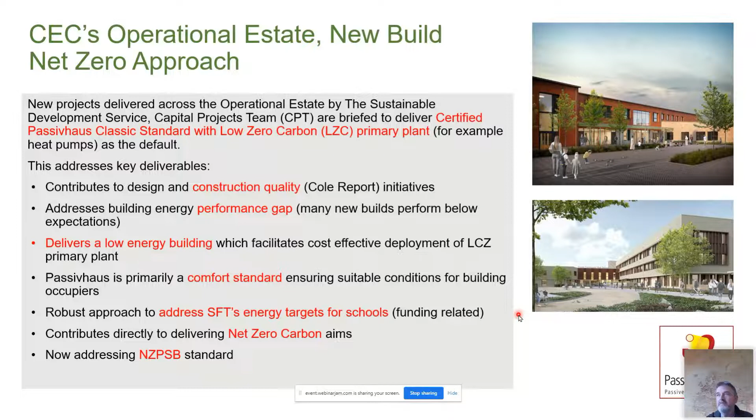So that's the new build, and strangely, that's the easy bit. The challenge is the existing estate, and we have 400 heated buildings on our operational estate. We're talking the schools, community centres, care homes, offices, libraries, and such like. And then sitting alongside that, we've got other properties which are not directly under our control, but we quite often get involved in works associated with them, the Edinburgh leisure facilities. So there's big opportunity there as well, but big challenges.

And another aspect of this is if we're setting targets as a city, there's a requirement to show some leadership. And in doing that, it really got us out of the blocks very quickly in coming up with how are we going to set out an approach and think about a methodology for addressing this issue.

Just a little bit on dealing with existing buildings. The inverted pyramid on the right captures in decreasing opportunity for reducing energy. If you're building a new building, get the location, orientation and form right, good Passive House stuff. And the fabric element down to appliances, lighting and use. And when you're dealing with an existing building, the ship has sailed for the upper issue where there would be big opportunity like location, orientation and form.

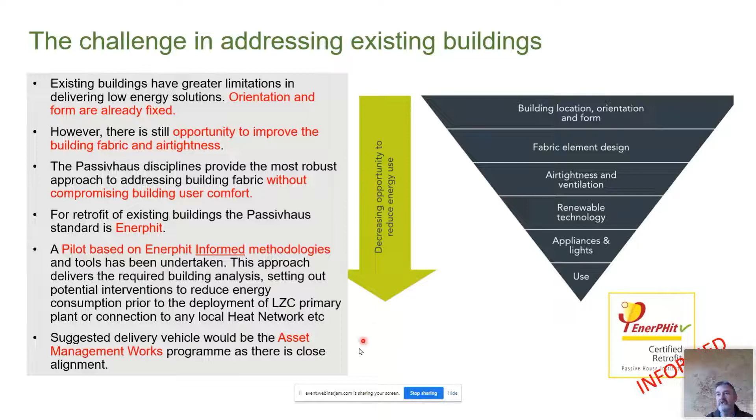And our route for this, being a local authority, we do asset management works, our life cycle replacement works. We've been on a kind of increased spend for the last 5-6 years. We actually peaked at spending 48 million on our existing operational estate while it was still up and running in 2019-20 before lockdown, and we've throttled that back a bit, but we've shown we can do quite significant interventions on our estate without necessarily closing buildings. So this was the kind of vehicle by which we would be looking at delivering any of these retrofits.

Just a little bit on asset management type work that we do. We typically would do roofing, we would typically do windows, everything highlighted in red. We would not normally be doing wall insulation, underfloor insulation, but we would in the past be doing boilers, replacement, electrical rewires and the like.

But now the things that I've got highlighted in yellow are things that we would likely be looking at going forward for buildings, wall insulation, underfloor insulation. If we're going to seal the building, the introduction of mechanical ventilation, heat recovery, or demand controlled extract, and potentially solar shading if we feel we've gone too aggressive with the approach we've taken to the building.

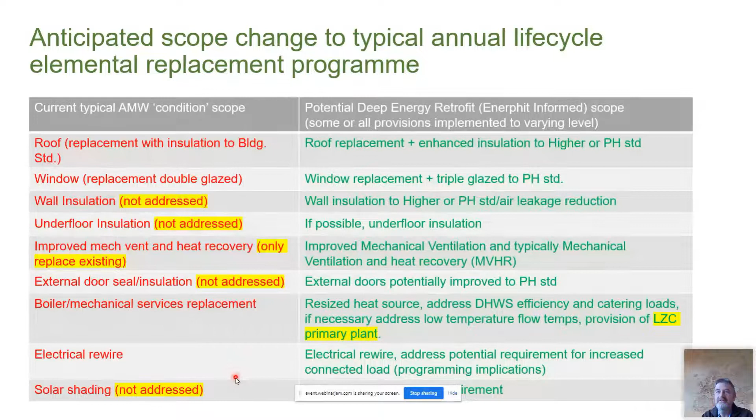So what I'm going to talk you through is our approach, using 2 pilot buildings, which we subsequently rolled out to another 10 buildings - one's a nursery and one's a primary school. I'll also cover a bit on our performance weighting methodology, why we took that approach, and something on quality and our next steps.

So, taking our 2 buildings, there's an image of each, and I'll say a little bit more about them when we dig deep into each one. One's a nursery building and the other is a primary school, and they're both very different - we chose them because they're very different. That's where we started the work to inform the PHPP modelling.

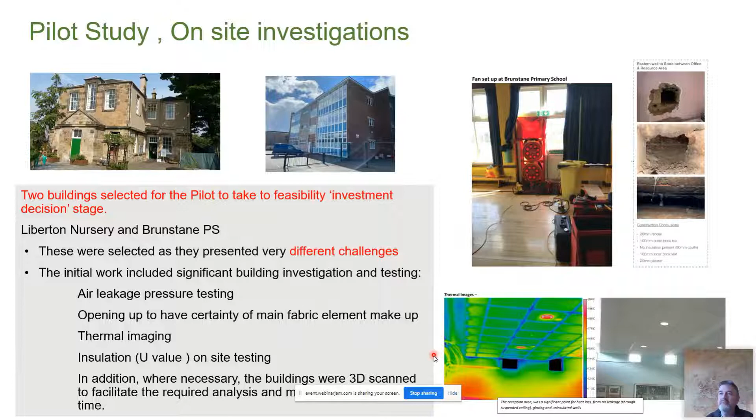We actually did air leakage pressure testing. We physically opened up the fabric to understand the buildup of key parts of the external fabric of the building. We did thermal imaging to understand where thermal bridging was possibly taking place, insulation U value on-site testing where conditions allowed, and also for modelling purposes on these two we did 3D scanning because we didn't have models of the buildings. So that was the approach taken.

A little bit on, as I said, our EnerPHit informed pilot methodology. What we do is take that information, build up the PHPP model, test that model against the actual performance of the building, then as a group think of suites of interventions of different levels of retrofit and put them through the model to see what we get in terms of energy consumption associated with it. So it's really an EnerPHit informed retrofit plan, EIRP, which I believe is an expression the Passive House Trust has started to adopt in this context.

And then a little bit on our total performance index, our weighting system to inform decision making. It's all about providing a series of options for an informed investment decision, or to help inform an investment decision.

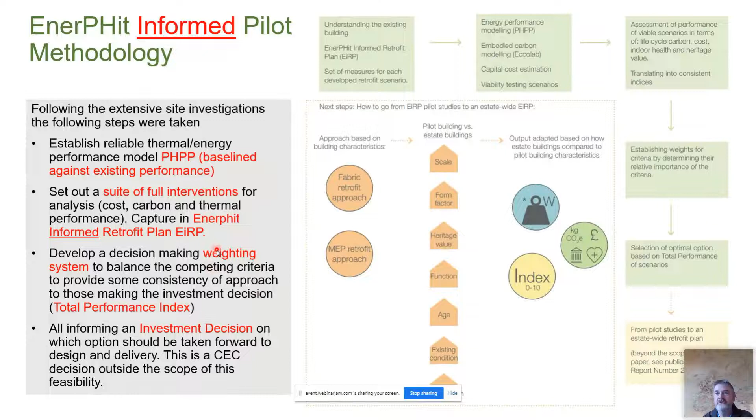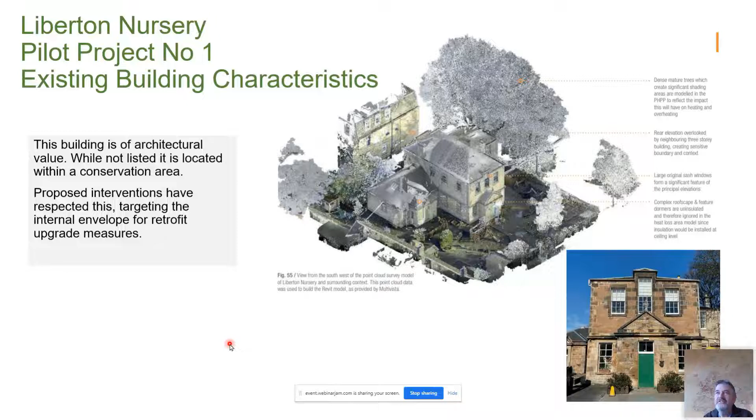So the first building, a Victorian stone building, is in a conservation area, but it's not actually listed itself, so that meant we could play about with it more. But what we were really looking at is that quite a lot of the estate in Edinburgh can be like this, so it's important that we put ourselves through the challenge of addressing one of these as an early pilot.

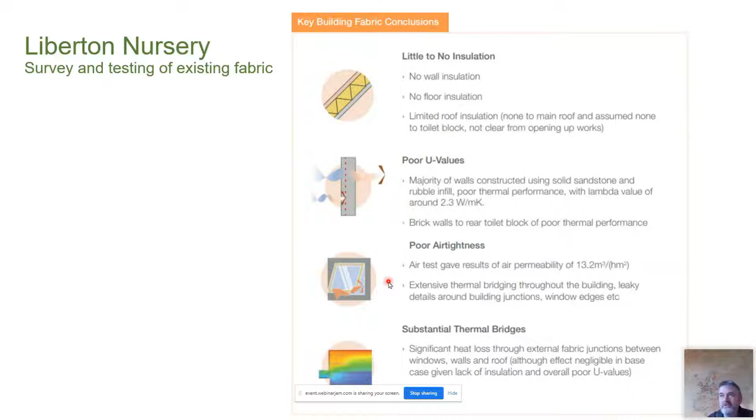What did we find when we opened it up and did all that testing? Well, no surprises - little or no insulation, U values were poor, air tightness was poor, we were getting a permeability of 13.2 cubic meters per hour per square meter, and we identified substantial thermal bridges.

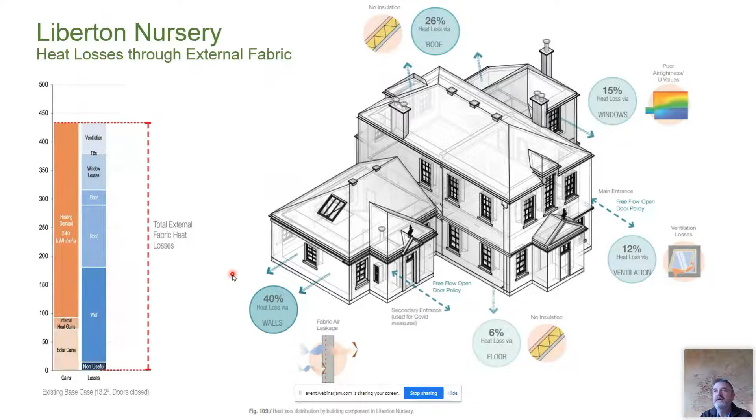If we were looking to go full EnerPhit, do the full thing, the gold standard you could call it, how far away is this building from that gold standard? You can see the heat demand is 340, and we would have to get down to less than 25. Air tightness - I'll keep it in air changes per hour - is 12.6, and we're trying to get down to less than 1. So this building would have a significant journey to go through to get to full EnerPhit.

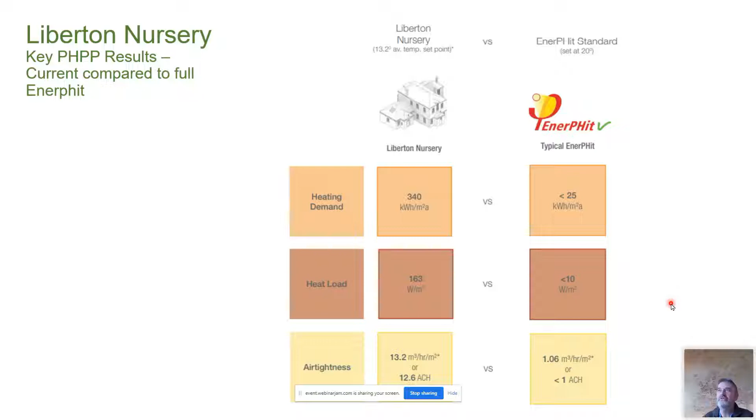This slide sets out - and apologies, there's a lot on it - the different levels of intervention and what the resulting heat demand modelling was. So what I'll do is, this top section here, the next slide kind of zooms in on those and shows the different levels of intervention.

The first one starts at do nothing - that's the existing building as we initially modelled it. MEP only was really talking about just putting in a heat pump. Not something you would do, but just to go through the exercise - put in a heat pump and take out the boiler - and then different levels of retrofit through to full EnerPhit.

So just focusing on these in a little more detail - the heat pump, we've got our air tightness shown there. But when we got to our kind of starting point to improve, you can see we're going for internal insulation on the walls, and you can see the insulation level starting to increase as you go through the standards.

And we've also got the introduction of mechanical ventilation heat recovery once we get to an air tightness of about 3, where there's traditionally a return on that investment. And then the full EnerPhit is a fully certified MVHR unit, more efficient than just a typical one.

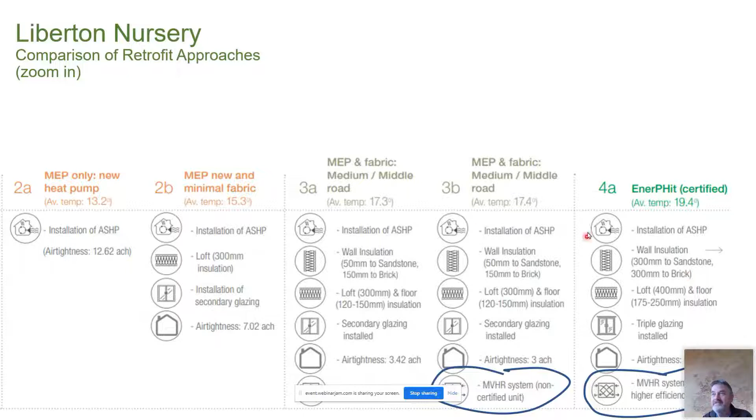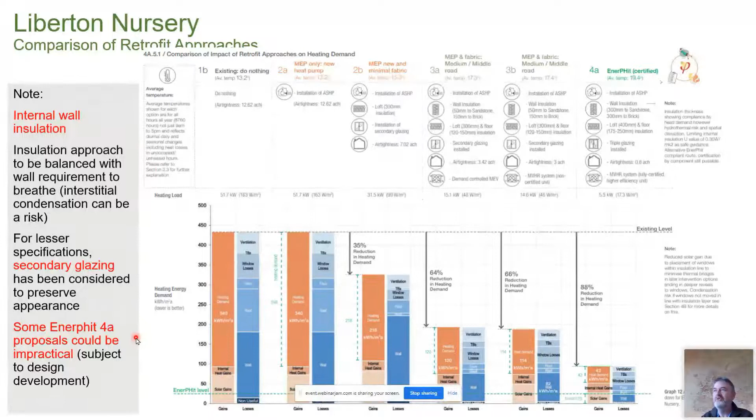Going back up, for these different levels of intervention, you can see reduction in heat demand: 35%, 64%, 88% reduction in heat demand. Some of these go from secondary glazing through to triple glazing for the full EnerPhit approach. Full EnerPhit could potentially be deemed impractical if you're losing 300 millimeters with the internal wall coming in — you're losing a bit of GIFA in your building.

We also did a bit of whole life carbon analysis, and this is really just a summary. I don't intend going into huge detail. What we did is we looked at it from the point of view of the deeper interventions, which introduced a greater amount of embodied carbon, and we thought, well, are we actually making the situation worse with this additional embodied carbon?

No — what we proved is that the operational carbon reduction more than offset the additional embodied carbon. So you were seeing over 70% reduction in whole life carbon associated with the deeper interventions. Obviously, the lower level interventions add less embodied carbon, and also the fact you're going from gas to electricity means you're making a step change in your operational carbon anyway. So that would show itself as a similar argument. We really did the modelling based on the two options that had the greater amount of additional embodied carbon.

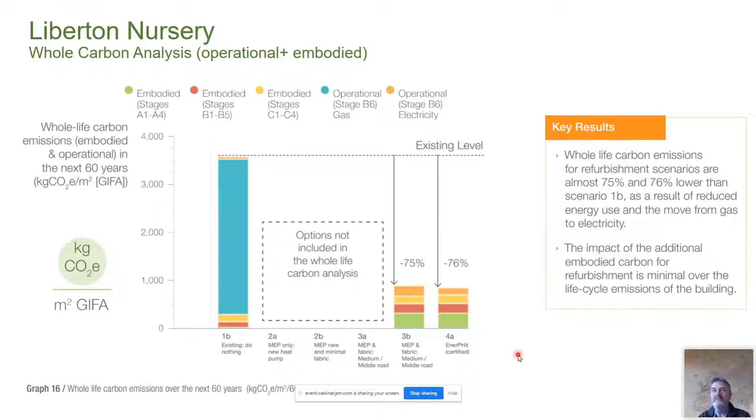Running costs — this is where it gets interesting. Please bear in mind, this is all based on third quarter 2021 energy figures for gas and electricity. But the overall story, possibly everything's coming towards improving fabric, but there's still some way to go. So the overall story stays broadly the same.

When we took out the gas and put in the heat pumps, despite the benefits of the seasonal coefficient of performance of the heat pumps, the mere cost of electricity meant on third quarter 2021 tariffs you were doubling the running costs. And then you could see the reduction — this is where I talked earlier about the step-off point. My initial thinking is maybe we do a level of intervention where the step-off point means our running costs aren't much different, so we've done enough fabric improvement before we deploy the heat pumps.

So you're getting into quite a deep level of retrofit to be able to do that. But as I say, this all jumps about a little bit with the tariffs that have changed and keep changing as well.

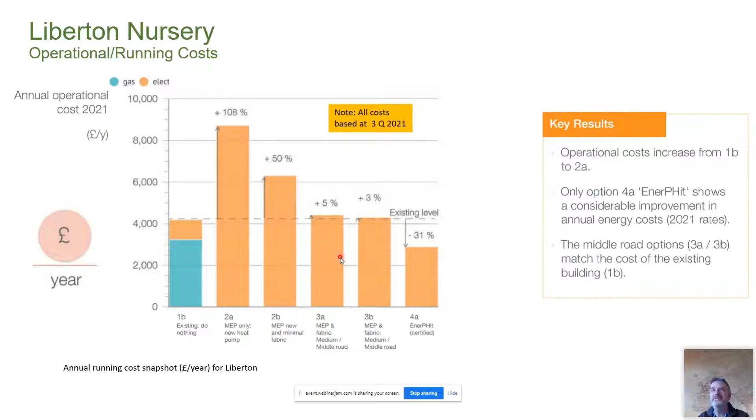All these graphs — I know some people prefer to see the numbers, so here are the numbers. Down the left we have our different levels of intervention through to full EnerPhit at the bottom. Our heat demand, as I say, the first one, we do nothing — we just take out the boiler and put in a heat pump. So 340 kilowatt hours per square meter down to 42, and there's a percentage reduction.

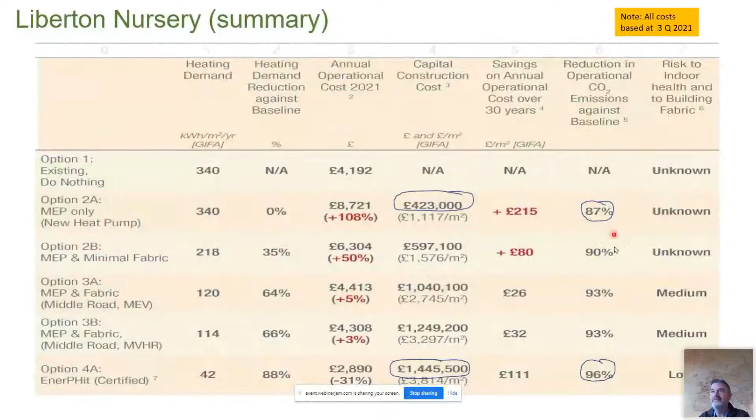It was just something we did as an exercise. If we just swap out the boiler for a heat pump, knowingly, existing buildings aren't great, and heat pumps aren't great at addressing existing buildings. Heat pumps are fantastic things, but they do have their limitations. This would definitely deliver your 87% reduction in carbon because you've gone electric. But you're going to need 3 times the number of heat emitters because of the lower flow temperature of the heat pump. You want to get that flow temperature down to benefit the coefficient of performance, and as low as you can go, you'd have a large heat pump and thermal store—it nearly becomes a heat pump farm outside.

This was the playground of the nursery, so that would be a question. You'd have greater impact on the local network in Edinburgh. It varies around the country, but we've been told most areas of Edinburgh are at or near capacity on the grid, since it's still a growing city. So we have to look at energy reduction before we go electric. Then there's occupier comfort concerns—if this is still a drafty building with quick fluctuations in air movement and temperature, and the slower response of the heat pump system could be problematic for us as well. So a number of considerations there, and anything you do needs analysis and care.

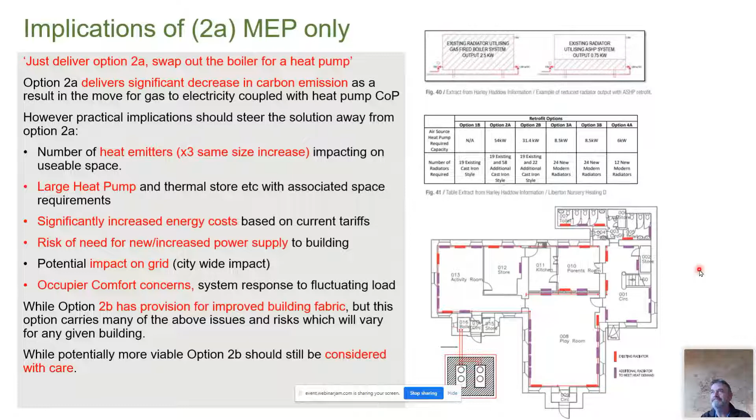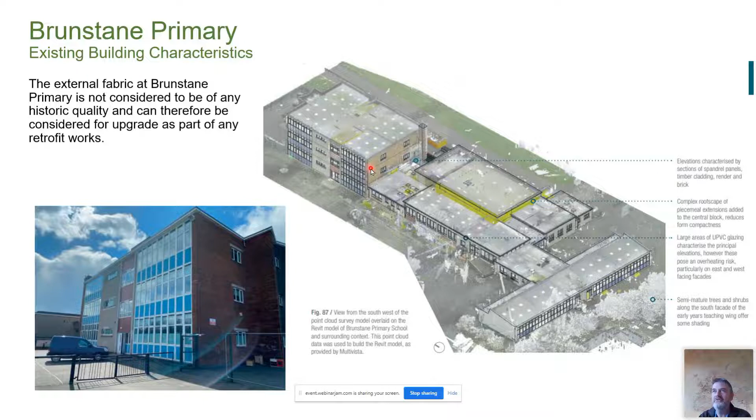The other building is a 60s primary, and as you can see, it has quite a significant glazing-to-wall ratio. As part of that testing, opening up, and thermal imaging, we also engage with the building user to identify areas that have been problematic operationally from a comfort point of view. And this building, surprise surprise, summertime overheating was a significant issue, which has a bearing on the approach and solutions we'd come up with.

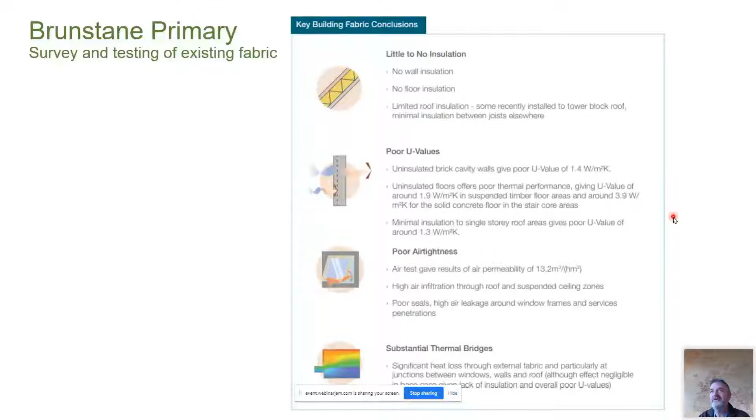That analysis, not very different for a very different building—the insulation wasn't great, so the U-values weren't great. The air tightness was 13.2, with thermal bridges everywhere. It's a bit of a shame on our construction industry, but we haven't been doing it much better than the Victorians right up to the 60s. And when you look at the performance gap, we still haven't been that great.

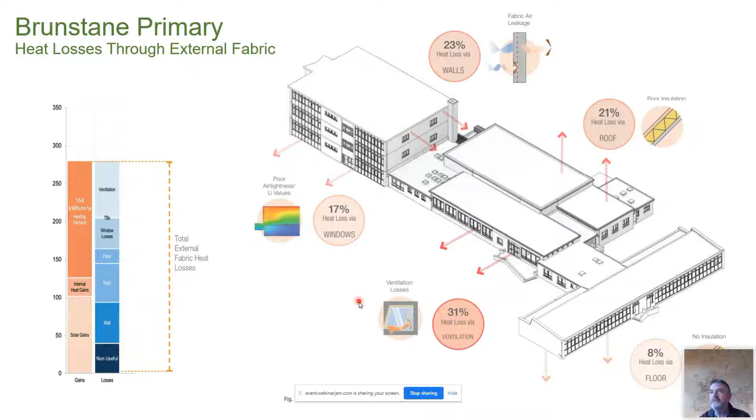Again, it's a repetitive process—same approach, same methodology applied to two different buildings, and we've done it for 12 now. We've got 154, and if we wanted to go full EnerPHit, you can see to get down to 25 is a bit of a journey. Similarly, the air change rate is high at 9.6—you'd be wanting to get down to less than 1.

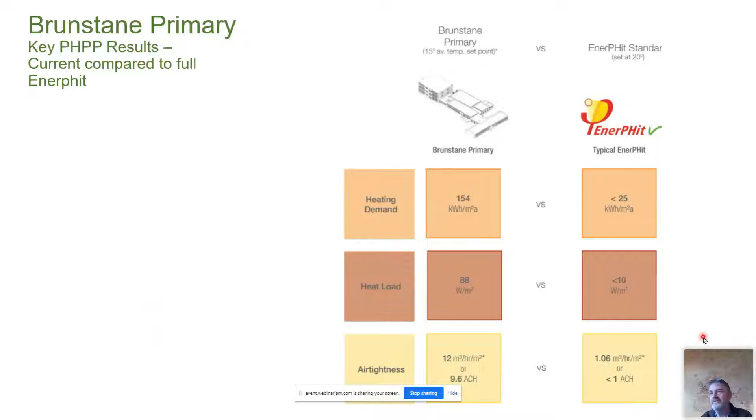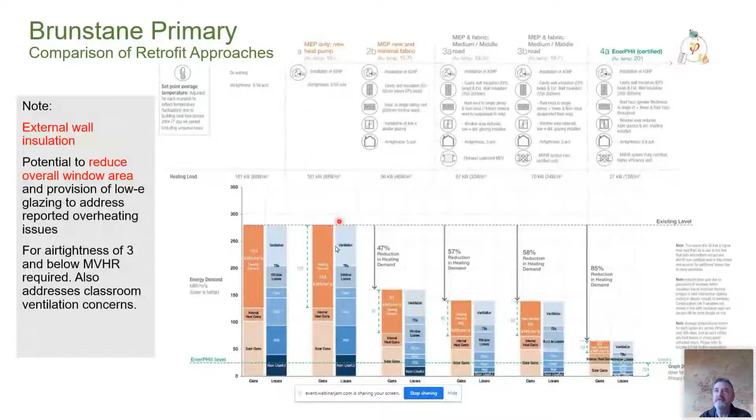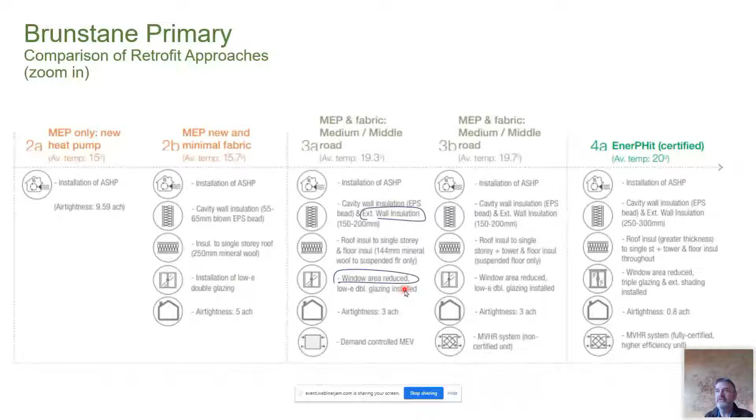As I say, similar approach, albeit these interventions are building specific. I'll go to the next slide to zoom in on these. We've got the MEP only option, which is just take out the boiler, put in a heat pump as a starting point—that's this one here, with different levels of intervention. What I've circled is what's different here: the last building used internal wall insulation, but here there's the opportunity to go external, without impacting the GIFA, and it's a quicker, simpler approach. Once we go external wall insulation, we've also got the opportunity to reduce that window area, so that's become part of the approach.

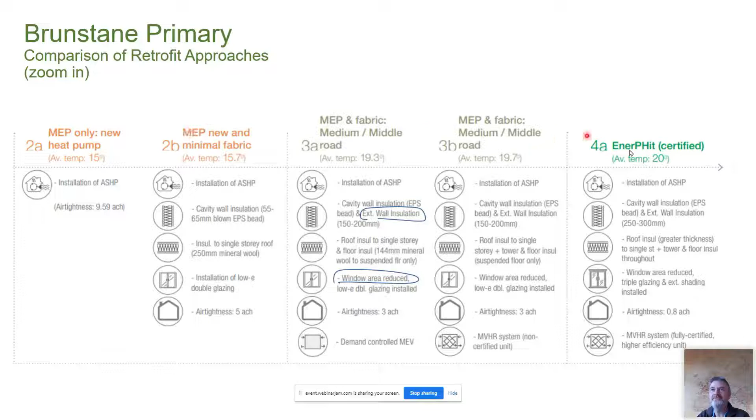And we've gone from double glazing through to triple glazing as a solution on that. The MVHR kicks in when the air change rate's down to 3, albeit we've got demand-controlled mechanical extract ventilation on this particular option. These options are really just what the team sat down and modeled, to see what it turns out like. We'll get better at this as we go along, and maybe have something more targeted—I'll come to that in a minute.

So the whole life carbon analysis, very different buildings, very similar story. The reduction or addition of embodied carbon associated with these deeper interventions was more than offset by the reduction in operational carbon. So we've got around a 70% reduction overall. What's remarkable is such different buildings show the same things, albeit the numbers may be changing, the same patterns emerge.

On operational running costs, yes, there's an increase if you took out the boiler and put in a heat pump without improving the fabric. It's not until you're getting into these deeper levels of retrofit, or ideally full EnerPhit, that you're seeing a saving. But as I say, that's based on third quarter 2021 figures.

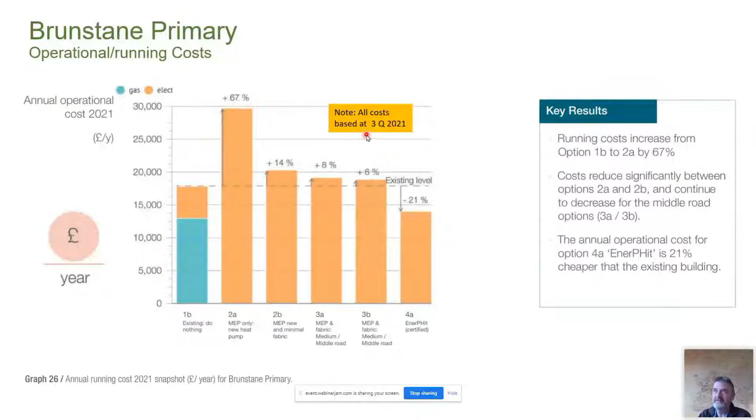The return on investment, again, just the same pattern. You do feel when you're doing this, going from one building to the next and seeing the same thing emerge, why are we doing this analysis every time? But at the moment we've done it for the first group because we think it's important to see if the patterns emerge. And it's the same point: it's not a return on investment, it's a carbon reduction investment.

Again, looking at the actual numbers, you can see the same pattern. You've got 154 reducing to 23 kilowatt hours, and you can see the reduction in heat demand, up to 85% reduction. The cost base at that time, third quarter 2021, was 1.5 million, and it would be up to 7 million to address that building to full EnerPhit.

Just as an indication, we've taken that building further, and I'm not saying we're going to necessarily deliver it to full EnerPhit, but we were asked to for a specific reason, about grant funding. We might step back from it, but that 7 million is more like 12 now, because you've got to add in the thing that figure has always excluded: decant. But at the time we identified decant would be necessary, even with opportunities to phase wings. By the time you add decant and inflation, you're looking at 12 to 13 million for full EnerPhit for that primary school.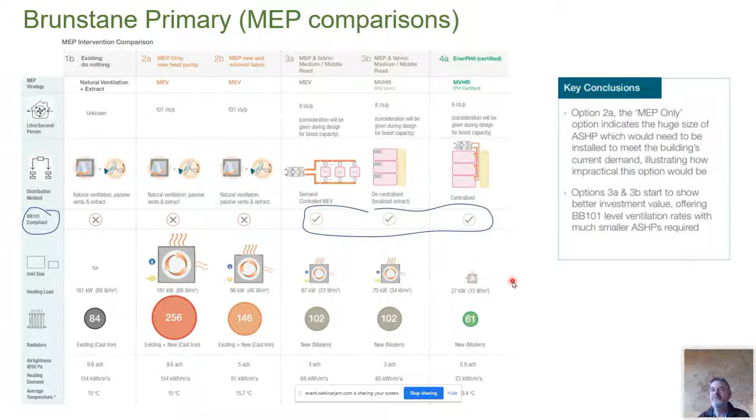We thought comfort, life cycle carbon, and running costs were the most important issues for us, followed by capital cost, then heritage impact, fabric risk, and then user disruption. I thought user disruption would be challenged, but it wasn't. The reason we gave it such a low score was that disruption would be for about 18 months of the life of the building.

But how this really works is we look at each particular issue. Some of them we've calculated and analysed, like running costs, so we know which one performs best and which performs worse on running cost. Some we know pretty much how it'll perform from an overheating or thermal comfort point of view.

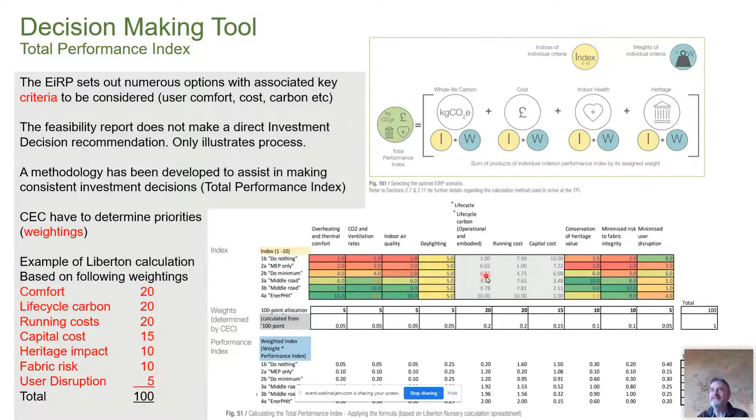So we give them that kind of index, multiply it by the weighting, add them all up and get a total performance index, just to give a feel for, based on what we think is important, which one comes out best. And based on that, for the nursery building, the level before full EnerPhit came into being slightly the best. But as these figures are so close together, you could say a kind of sensitivity analysis - you don't have to tweak very much to change these numbers about, but it's indicative.

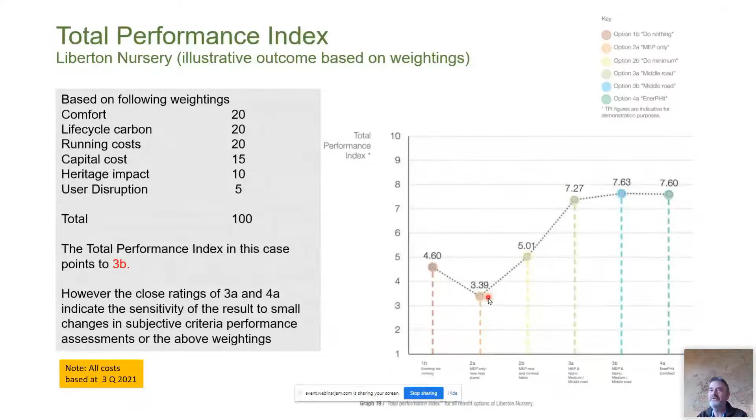But it just shows that the MEP only approach for various issues around comfort and the like gets a particularly low score. So if you were taking that option, you'd have to do it knowingly and give it some real thought. What does that same analysis look like for the primary school? The nature of the building just means that the full EnerPhit came out top based on those weightings. That's not to suggest we're going to be doing EnerPhit across our estate. Wish that we could, but we wouldn't be able to afford it, I expect. So it's an interesting exercise.

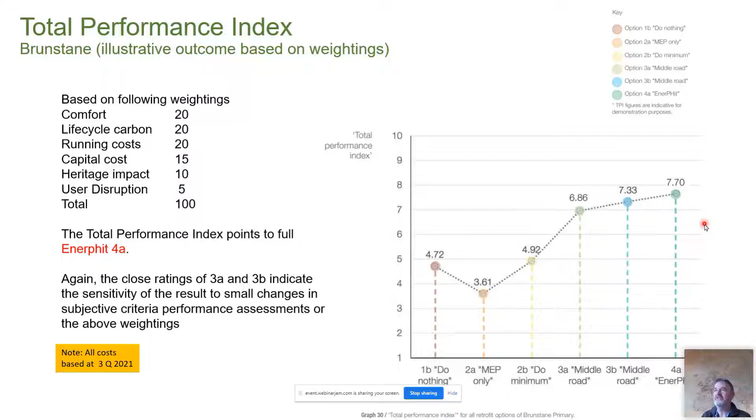And when the decision-making process is properly made over more buildings, we will adjust these weightings to align with the kind of discussions that take place. And then that just means we've got a degree of standardization, or a touchstone to revert to, as decisions are made on the future buildings.

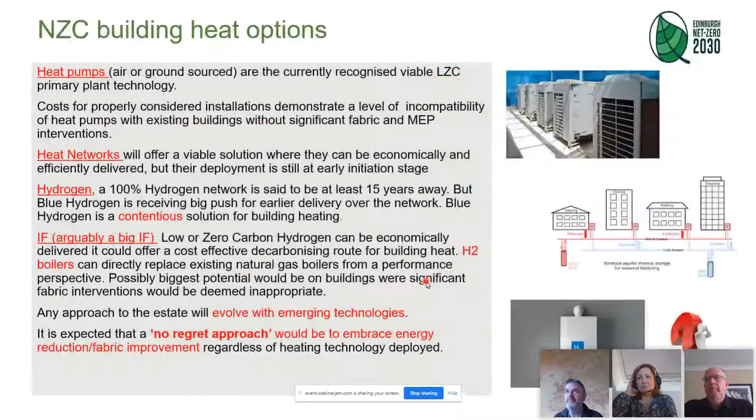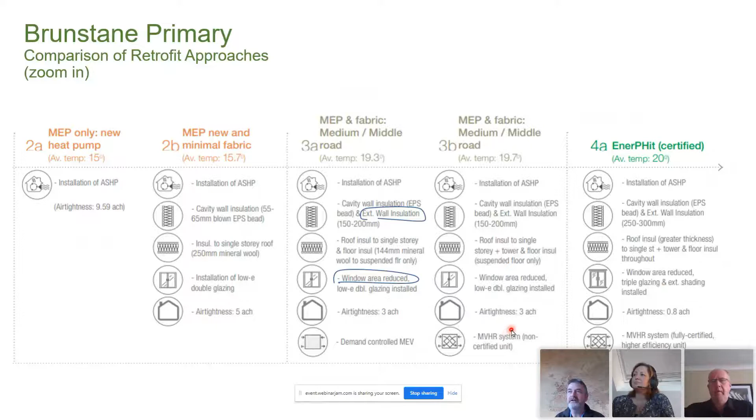So if I zoom back, if I go back up, where are we? Looking at option 3B and 4A, sitting embedded in them would be, that one's double glazing, this one's triple glazing. So there would be the tweaks. It's embedded, we didn't look at it in isolation, if you like. It was just embedded in all the interventions for the building.

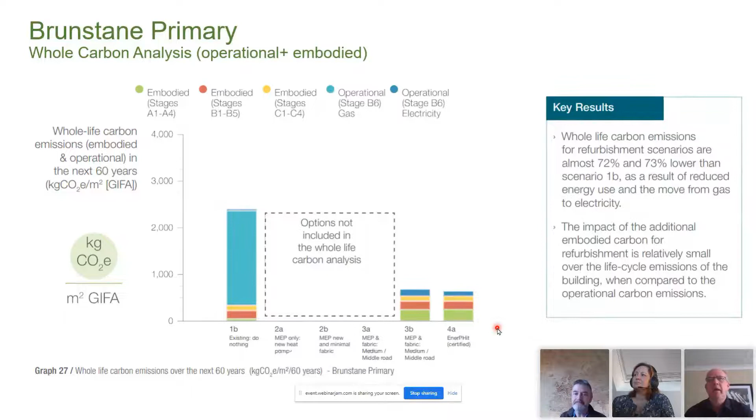Okay, thank you very much. Just as a personal note, I noticed your options when you say just put in air source heat pumps, I'm not sure how it works in Scotland, but certainly down here there's government grants that come out, and everything's like it's just focused on one area. So it's about getting, say, air source heat pumps fitted. There isn't a strategy that's gradually getting the fabric ready over a period of time, and then you introduce air source heat pumps. It's like, well, there's money now, we've got to go for it, which from a technical perspective all seems a bit upside down.

It is actually a shame, because I think there will be people who will have bad experiences with air source heat pumps. I'm sitting in a 1930s semi-detached house at the moment. If I put in an air source heat pump into this house as it stands, it wouldn't be very clever. Because of what I'm doing, I've got a fair idea of what I would need to do, and what I would love to do, but at least I've got a sense of doing this, this, and this before the adoption of air source heat pumps. They are fantastic devices, but their limitations are exposed when you apply them to existing drafty, ill-sealed, poorly insulated buildings.

Yeah, I absolutely agree with you there.